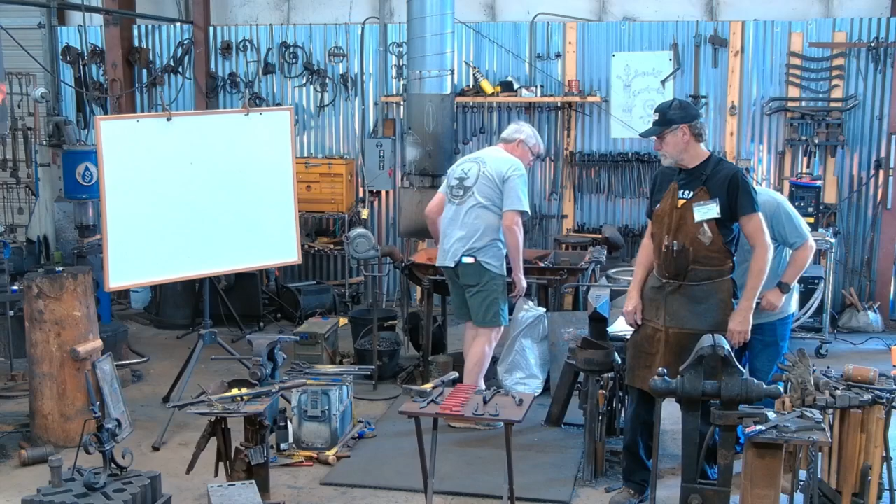All right, everybody, we're going to go ahead and get started. Why? I'm not in the... I know, I'm all right.

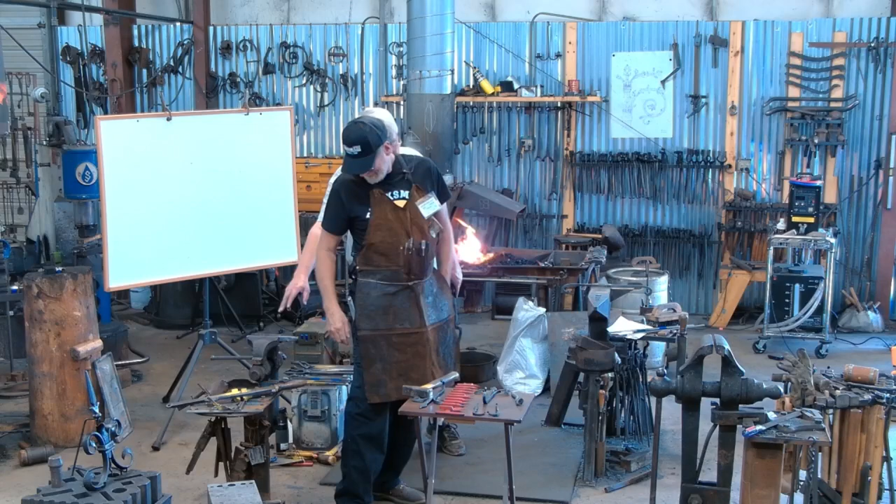A quick side note that's not really a side note, we do have one of our founding members, Mr. Clay Spencer, sitting right up front here. I think Clay's 92, 93 now. How old are you, Clay? Enough? Not enough yet. All right.

Go ahead, thank you. First of all, I want to thank Athens Forge for having me come down. It's very much of an honor to be in this forge and working. Y'all just don't know the talent - well, you do know - the talent, the opportunity you have here is incredible. The knowledge that can be given to you if you're just willing to come and participate and take part of it. It's very fortunate. I myself, years ago, our local guild was not doing real well, and I came that close to making this my permanent forge - 98 miles from the house, but I'd come every month. It's just a great place to be here.

But anyway, a little bit about myself. I started blacksmithing at the Rutherford County Blacksmiths Association about 1990. Did that for a few years. My wife decided to start a business, and I had to change a little bit at work too, working longer hours. But I really did get going hard about 2003 or so, and started going to the folk school a lot and just went hog wild after that. My wife became a blacksmith's widow, she said, pretty much overnight once I got into this. So it was very much a passion of mine. I live and breathe it every day, every night.

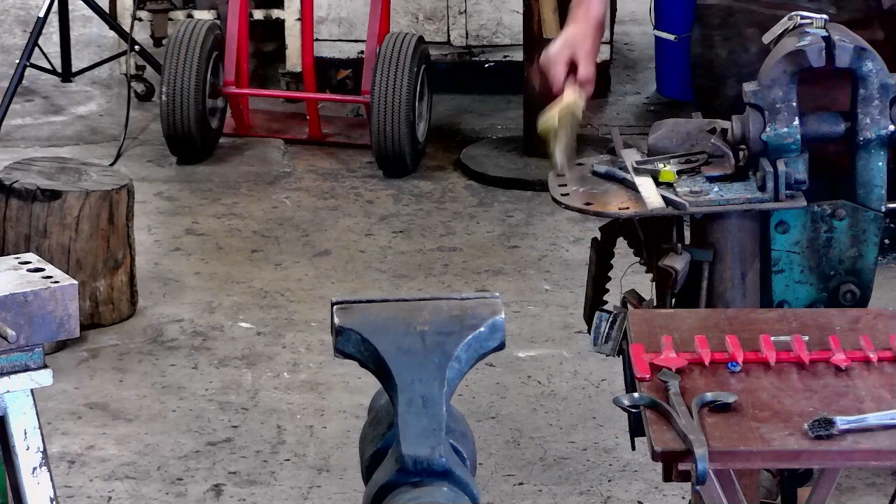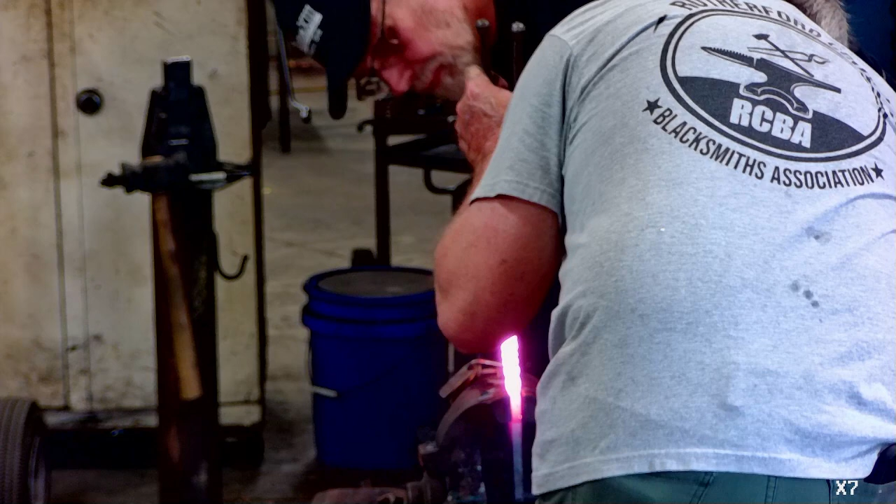Drop down. Oh, yeah, that's good. Actually, I want to go in the other way.

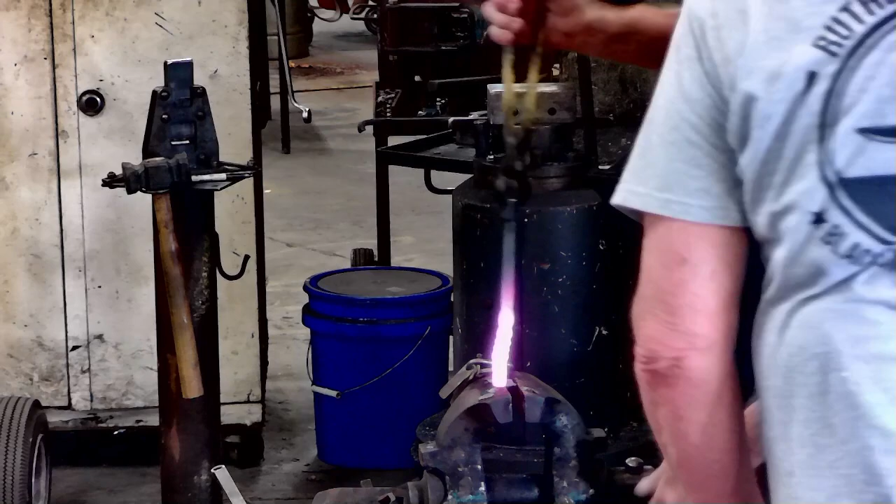Tom and I have not done this together, so he didn't know. That's fine. That looks nice there, pretty good.

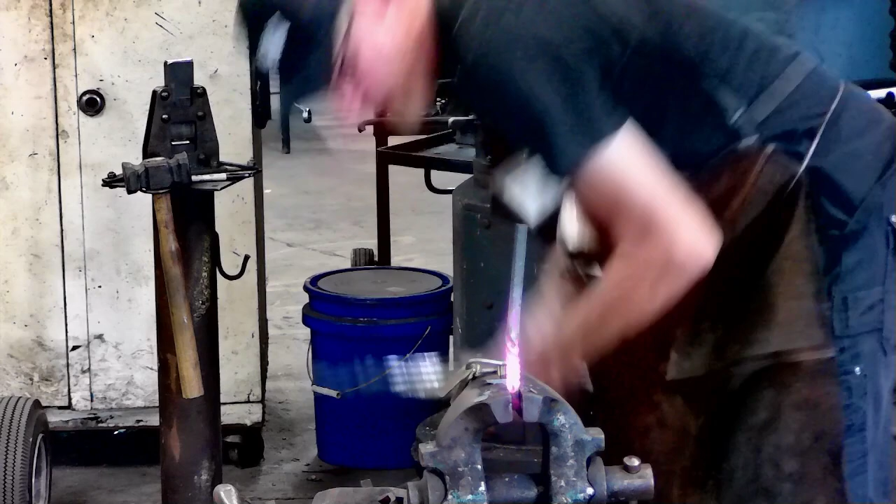Now I'm a big believer, I use a term all the time, keep your house in order all the time when you're forging. When I mean keep your house in order, if anybody's ever built anything carpenter, you're always checking plumb, level, and square. So I'm always keeping everything as plumb, level, and square as I possibly can. So always remember that when you're forging. It will help your life out a lot.

Okay, now we're going to catch this top part right there. And I'll come out of there and go to the anvil here. There's nothing any worse than trying to forge a bar that's bent like this, and you turn it, it goes over like this, and it turns back and forth. But if you can just turn it back and forth, it's a lot cleaner on your forging that way. It's just a simple little thing to do, but it helps out tremendously.

I like to use these leather face hammers quite a bit to straighten stuff without damaging it. Okay, that'll be high enough. Short heat. Good? Yeah. That's good.

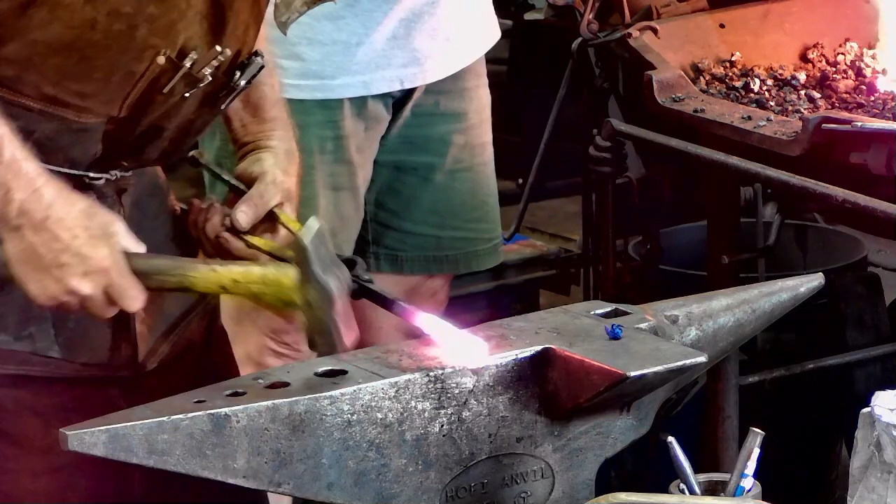So now I'm going to point the end of this right here. We're going to put a point at the top of it.

Always work the edge of the anvil, because then your hammer is able to get back over the air part, and it will allow you to hit down with more force. The edge of your hammer will not be hitting the top of the anvil. I don't think Travis would like it very much if I started working on his anvil too much.

While I'm doing this, I'm going to be rounding this up, and I'll get into the reason why. I'm going to take another heat on this. Yes sir, right there, stick it in. Yep, okay.

When I'm forging, for my style at least, when I'm working the coal, I like to work from the top down. I don't ever put it just straight in, because you're going to make a little pocket, a little cavity. The hottest part of the forge is the coal, not the air going back. So if the coal, the most amount of coal touching your stock, it's going to get hotter faster. That's sort of been my theory over the years. Plus, you'll a lot of times end up with a little cave, which cave fires are really great for forge welding. I like to do those, but I kind of like to have that coal right against my stock.

Everybody's going to have their own theory on a lot of stuff in their forging habits. You make your own theory, whatever works for you, do it. That's the main thing.

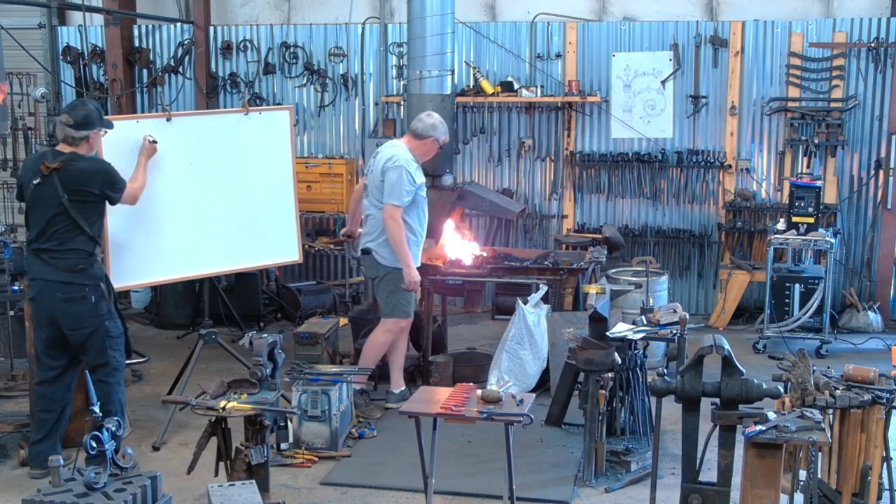Now, one of the things that when I was teaching green coal quite a bit, which we have a very extensive class in our local guild, people did the spade hook and their tops began to look like this - it bulges out like this, that's the way it looks.

Why? Because we forge a point. What we need to do, though, is come in - let me erase this. When you got your stock sort of here and here, it's forged kind of like what it is now, and this down here is round, kind of rounded like that. I come in here with a ball peen hammer, and I'm going to put a little indentation here.

And I'm going to do the same thing over here, backed up by the anvil, the horn of the anvil. Everybody see what I've done here?

So what I've done now, I've preformed the steel that I want to look like, which is this right here in the mass. I'll pass this around. This is something I made several years ago.

It's the 3/8 spade hook as well as the 1/2 inch. Hi.

So on that same note, this down here I made round - it was square originally. When you take a piece of round stock and it's backed up by the anvil and you hit it here with your hammer, this is going to go this way and this way. So you're going to get a lot more spread in your leaf than you would if you left it square.

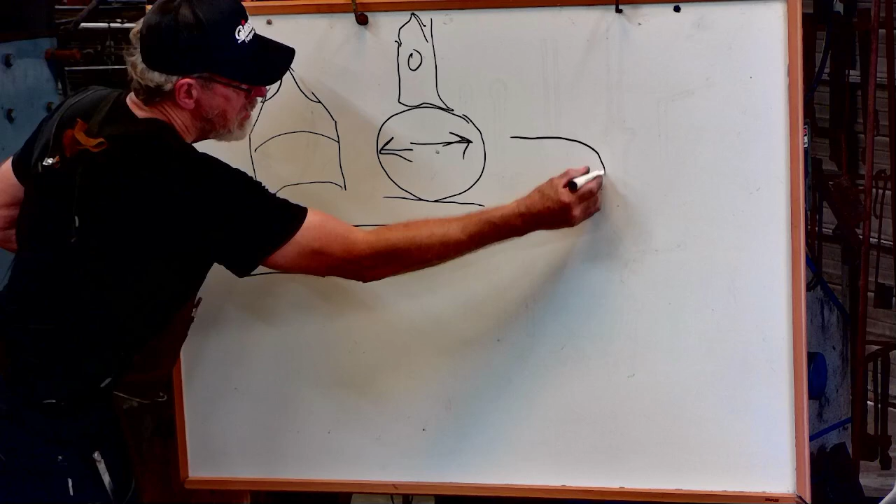And then I'll be turning over to my cross peen, and I'm going to start spreading it left and right. Any questions or statements on that? It's one thing I found over the years, to get that nice spread of stock going really allows you to get it really wide.

All right. You got it? Yeah, okay.

Now I brought that down to just about that much in thickness. I'm leaving quite a bit of mass. All I've done is just made a little bit of flat on this side.

You can see how it's got the little offset there. See it back there? This is flat side there. The end is spread out there. You can already start seeing some of the shape I'm talking about. Yeah, right in that area.

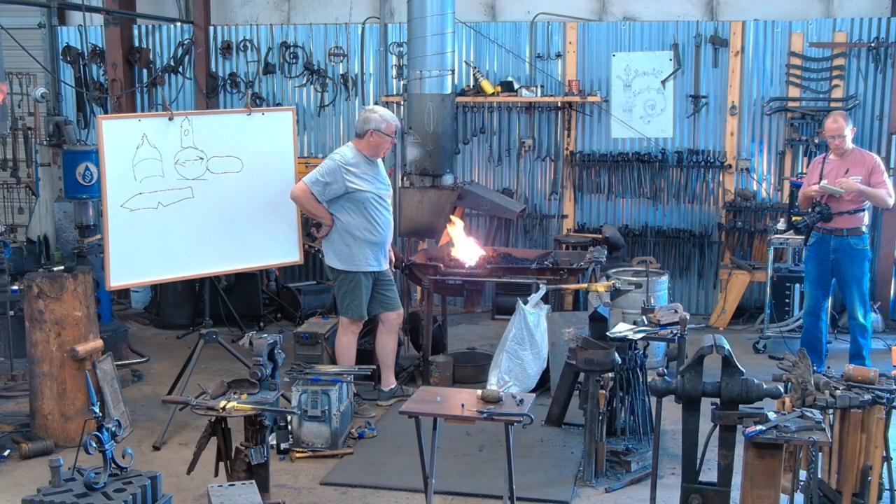and now I put that little indentation in it, right here. You can kind of see it here a little bit more pronounced than I had earlier. Right here I'm talking about, on that tip, kind of gave it that little swoop. Right in that tip, right in there.

Show it to the camera. Show it to the camera? Okay, where's the camera? Okay. Do I need to back it up?

All right. There you go. We'll warm that back up again, and I'll come in and I'll start my cross peen, which is nothing but a wedge driving in the metal.

It's going to spread. This part here is the steering wheel part of the hammer. You can guide the steel anywhere you want to go. Twist it this way, this way. You can actually roll it up on the edge of the cross peen and work more detail. You don't have to use the whole piece. If you need to just peen something out this way or this way. But there's all different style cross peens. That's going to be your steering wheel part of the hammer, I call it.

A little more heat. Yeah, a little bit more, go a little bit deeper. You can cut the air back if you like. Just cut it off for a second.

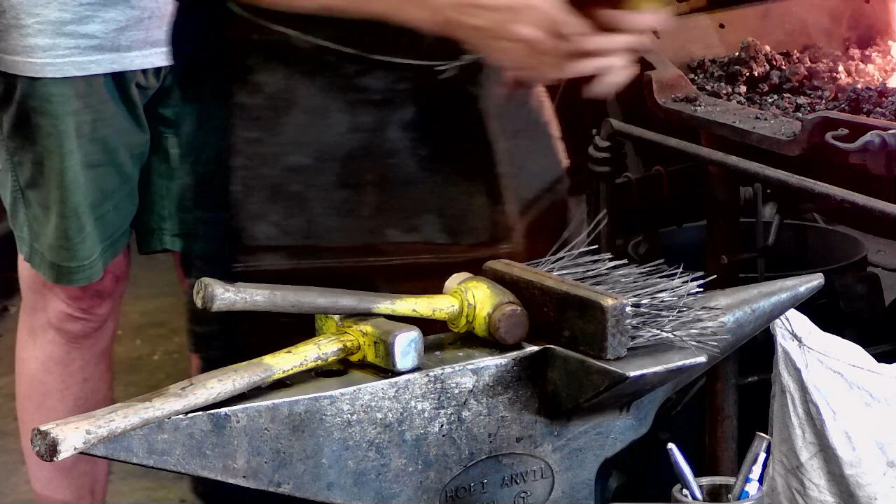Water. Water right here.

Blacksmith Depot? Okay. I like those long bristles. They're nice, they clean really good.

One day I had a piece I was holding in my hand like this, and I handed it to somebody. They said, 'Oh God, it's hot.' I said, 'Well, it's just warm,' I thought. But they dropped it all on the floor. But this is sort of what we got right now.

By presetting a lot of mass, by presetting those forms when it was in a larger mass, it allows you to just hammer stuff out and it becomes that. So just remember, if it's something you want to form into a spade or something round, preset the shape, blast that out and send it left and right, or however you want, with a cross peen hammer.

The next thing we want to do is, I have another piece here.

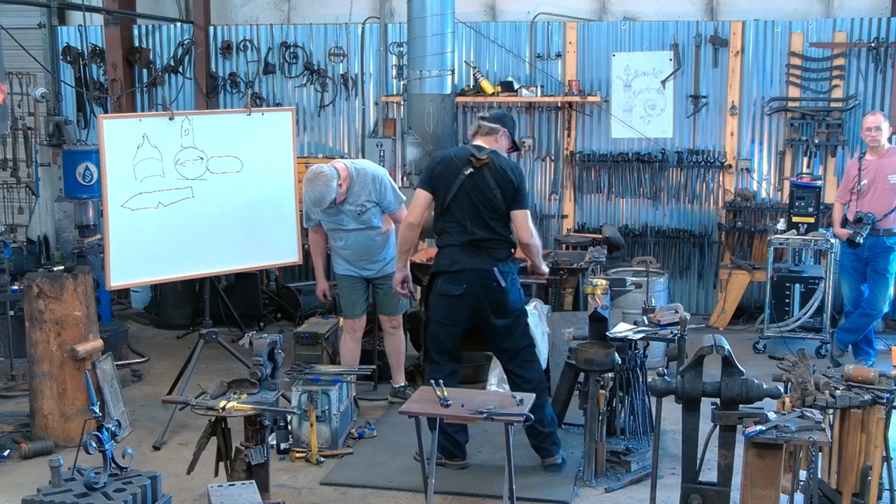Stuff on the back side of your box too. No piece of metal about that long. No, I was looking for the short piece, another piece of that. This is it here, not that.

Anyway, we're going to form a taper on this end right here. I want that to be about 4 inches long after I taper it, forge the taper out, and I want it to end up about 1/4 to 3/16 in width or thickness left. I want to keep a 1/2 inch mass running long ways with it, because I'm going to bring another piece of 1/2 inch bar around that. I don't want it any wider than half, nor any less. So I'll be using a gap gauge, checking that regularly.

This is one I made years ago, not as fancy as the one that Travis and them made down at Ernie's class, which I didn't make it to, but I do have a little ruler on it, with marks at 1/4, 3/8, 1/2 inch on up to 1 inch. This is a real handy little tool to have for quickly measuring stuff when it's hot.

Buy these also. Ron, you were making these for a little while. Ron Howard, you were making these for a while. I've got one of his. I should have brought it, but it's too nice, too pretty. Ron does some really nice work.

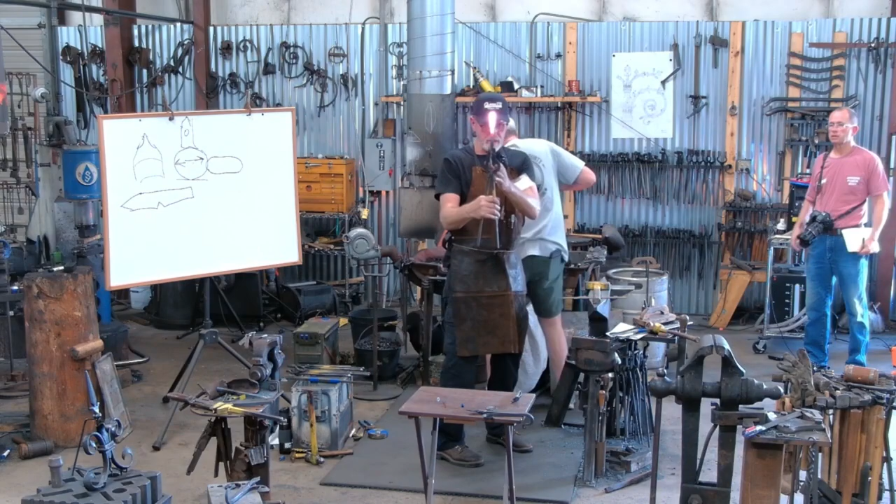Catch that crossways in there. Yeah, like that. Now I'm going to catch this. I want to make sure I'm looking at the little spade up here, because I want to catch this on the side.

For me, when I'm forging anything to a given dimension, I like to take the finished end, which I'm wanting to be about 1/4 to 3/16, down to a pretty close size, because I want the rest of it to be about 4 inches. That end is pushed out just a little bit.

Keep your house in order. I'll upset the end of it back like this, so that gets that back square again. I'm losing a little bit of heat. Your favorite friend in blacksmithing is heat.

Any questions or statements at this point? Y'all quiet. I'm not doing that good.

Yeah, that's good. Always brush back to you when you're demonstrating. You don't know who might be sitting in front of you. If you do know who it is, you can brush forward. You might want to shower a little bit of sparks.

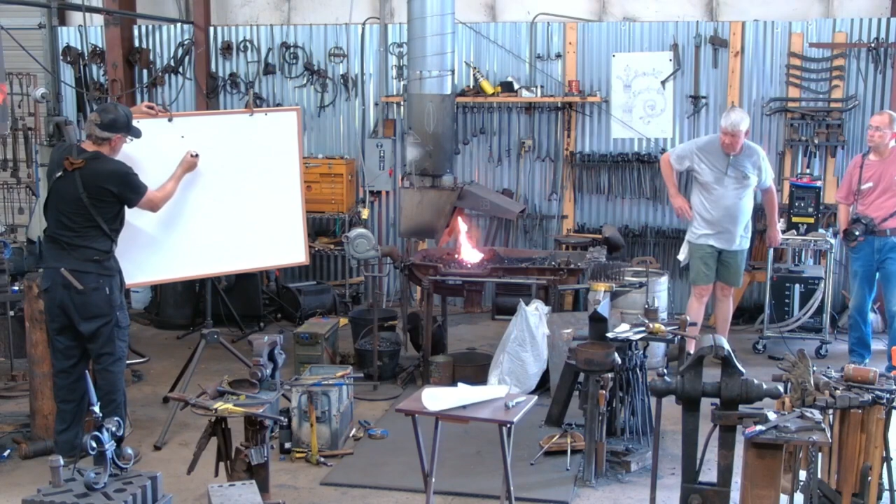But why does that work? Why do we bend that? Several people here may have made sheet metal cones before, to make a roof vent where a stovepipe's going to go through, sort of like a dunce cap. So the way you make that, and the way you come up with it is, you have a point up here, your stock is out here, and you come down here.

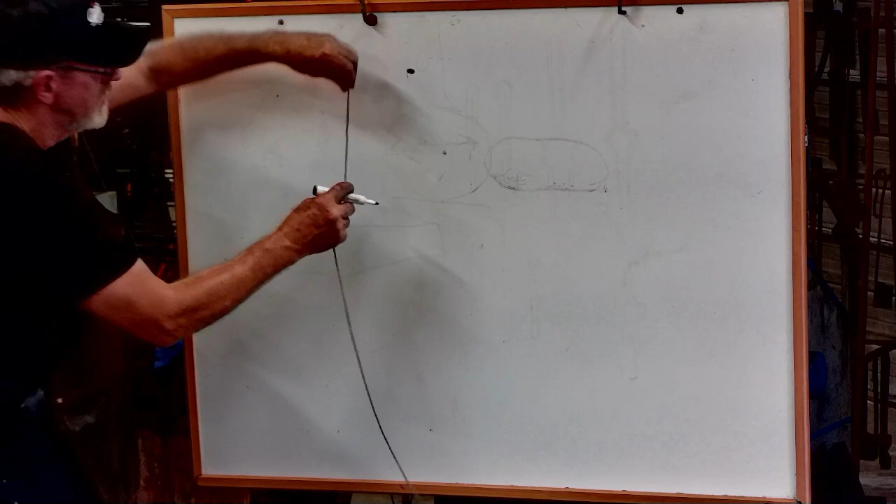I carry this belt a lot of times for measuring, as well as this. I'm going to hold that right there, come down here, and draw this arch, just like this. So I cut my sheet metal. I'm going to draw an arch up here too, that's where the opening is. So I cut my sheet metal where it does this.

So it's the same thing as the scroll there. It's going to be arched like this, and it's only going to be 3/4 of an inch in width, like that. Anybody got any questions on that? This is something kind of new I'm trying to teach with. Everybody understand what I'm at on this? Please give me feedback.

So you can see the stock there in my sample pieces going around, how I bent it to that. So when it gets wrapped around by little hits here, here, here, here, here, here, here, and here over the horn, that's going to wrap it around to where it's going to be flat. You could take this piece of sheet metal and put it in a brake or on the edge of your table, and keep crimping this piece right here, just crimping it, that, and that, and it'll be round. It'll have flats going like that paper. But that's the mechanic side, the why a bevel scroll works. It's about the curve in it.

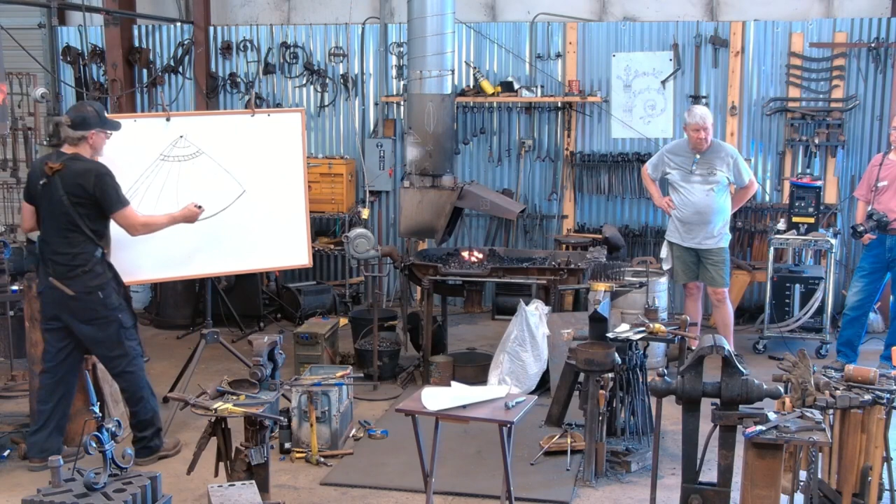So I actually took that little scroll and made it real small, like that. And I came up here, brought these lines up here and here, and came down and laid the whole thing out. Knowing the distance I had to make to wrap it around, I actually laid it out that way. Now, being that small on that little width, you can make a lot of adjustments with a pair of scrolling tongs or anything you want. It's not a given, but you'll kind of see that's the process of making this happen. Anybody got any questions on that?

Y'all too quiet. But once you end up taking that and doing that 90, do that turn on the last step, does it automatically cup or do you need to cup it? It will start automatically cupping. Now, sometimes when it comes out to that little point, that will want to go flat with you because there's just not much resistance. If I had that totally 3/4 of an inch or maybe an inch in width on that bevel part, it would stay more uniform. But where it comes to a point, it has a tendency to get distorted there.

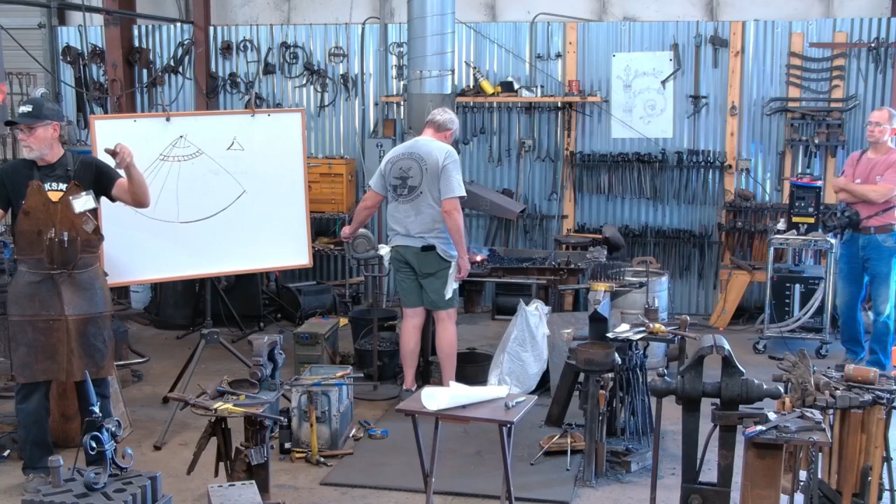If you want to make this and you don't want to put the bevel scroll on it, I've seen this same thing done years ago with the same hook. I just came off of those two wings and took two curved pieces, just a nice simple scroll curved out, and they look just as nice.

Let me get you a piece of 3/4 stock, or half of 3/4. I had a long bar, 1/4 by 22 inches. Just take a short heat on the end, just like this.

Any questions or anything?

The first thing I'm going to do is start bending that over on the end, that little piece, and then turn it and come to the side of the anvil here and start drawing it out to the side. I believe you can pull metal with your hammer doing it this way, a considerable amount. You will not ever push metal this way, you can almost forget that. But you can catch the stock right here on the edge, hit it at an angled hammer, and pull that stock. It'll pull with you, trying to spread it out, because that's what I'm wanting to do here - pull that out.

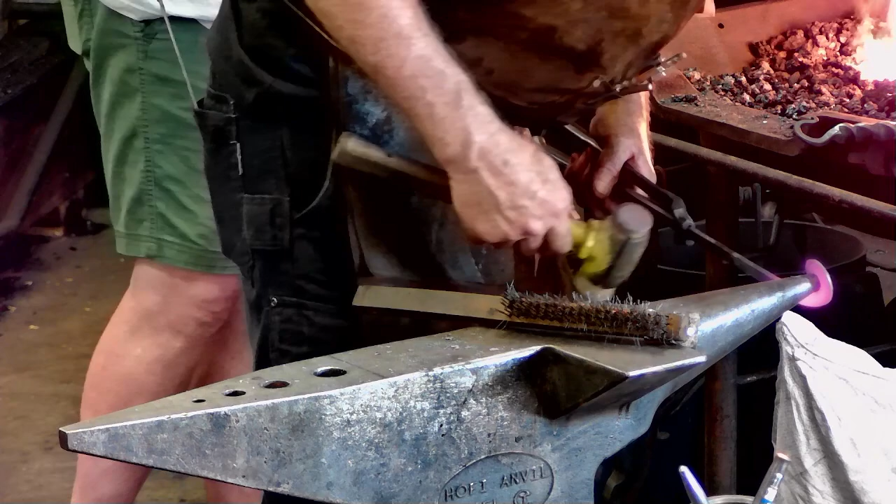I said about training your eye, sometimes it can be the devil in you too. I could see about a 64th of an inch there that had just a little bit of a piece sticking up, just didn't look right. So it can be the devil in you, it can be a big curse.

So that being said, this part here is done at this point, and then I'm going to come in next and curve that around. But I just want everybody to see it. How are we doing on time? 10, 15? Okay.

Okay. Did I pass the other piece around, the double end? Did it come around, the double end piece? One of these was on each end. Okay. This is sort of where I'm at right now - or not where I'm at, well, halfway there.

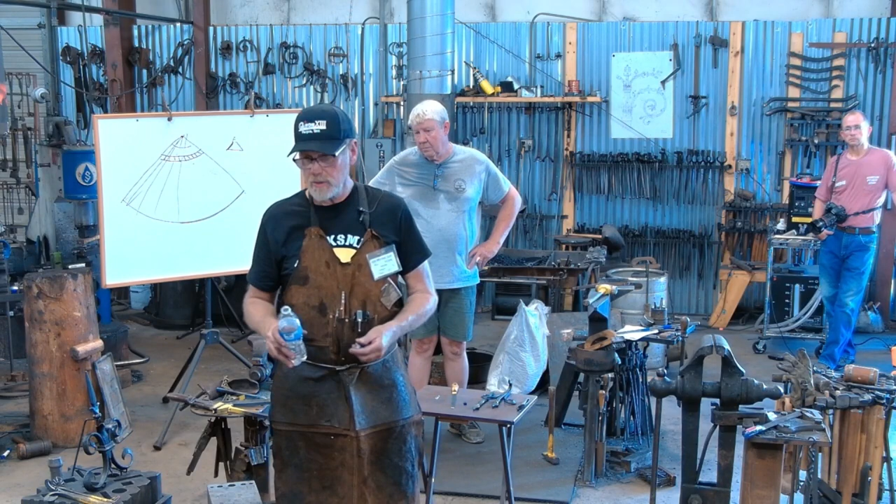Trash can. Thank you. All righty, it's hot. Might be hot enough already. Okay. Oh, yeah.

Now we're going to try to repeat what we're doing. It's always the hardest part. Somebody once told me, might have been Clay, said, boy, it looks good, now make 20 more. And see how close they are.

Yeah, that's correct. I did this one time, kind of like that cartoon where they had the guy making the canoe. One end went up, one end went down. I did this one time like that. Most of the time when I do this, I'll usually hit the same end down here. Just say, okay, that's how I want it to be.

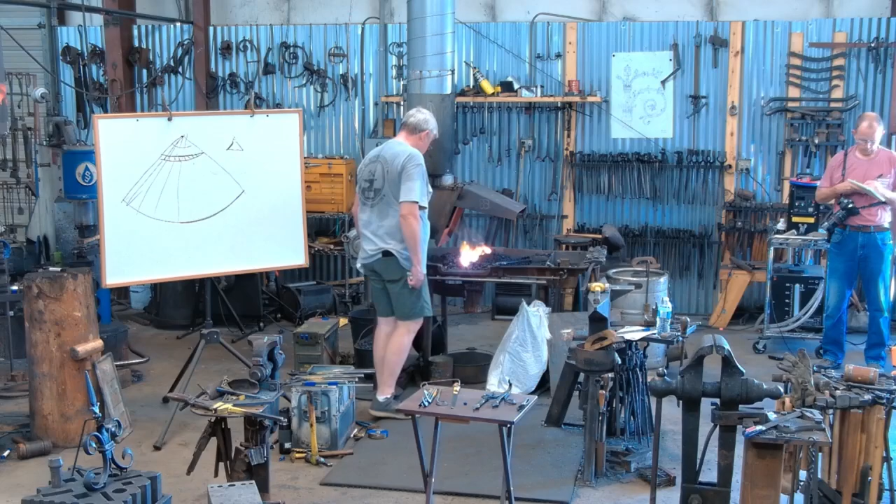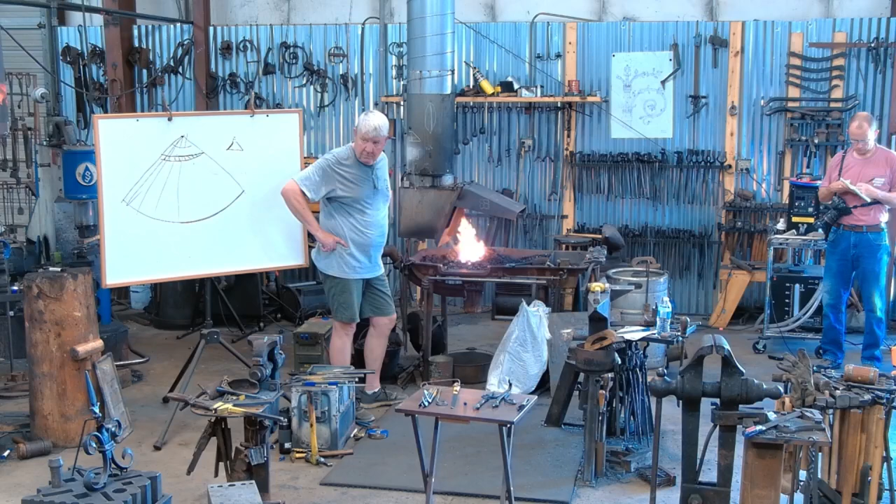I finally get that bevel the right angle that I'd like for it to be. You can kind of see the angle there. There's the angle there. You see the angle.

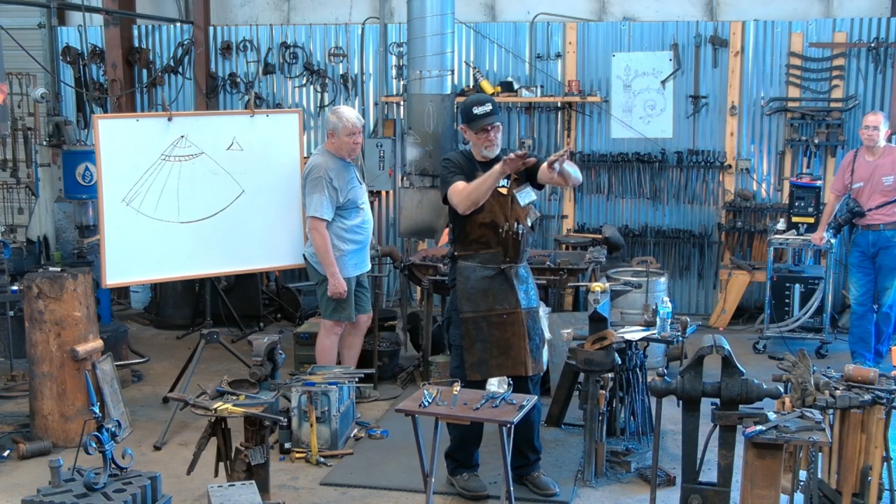Now, a little thing that I've picked up on doing these: when you're looking at your tongs and it's to your right, you want to twist your tongs counterclockwise. Why? Because I want this piece that's coming out like this, it's between my tongs. I want the tongs to go flat and this go under it. So I'm twisting the metal. You want to take your hand and gradually bring that around. So that's going to take the outer edge of the inside of that radius and be on up in the air. See, the outer edge will be on the anvil, and so I'll be knocking the inside down. But now the inside will be on the anvil, and I'll be knocking the outside down.

So that's what, yeah. Can you use the cone over there next to the camera to get that rounded? Can I use what now? Cone mandrel.

Cone mandrel right there by the table. You could, but it'd be real difficult because you're working this way. Now the cone would be a good anvil to go clean it up. This anvil here is also a very good anvil to clean it up and detail it. But it doesn't really form it. Each bend has to be bent individually. If you took a pair of scrolling tongs and just tweaked it around, it would form that edge. Maybe not as smooth and nice doing it this way, might have some steps in it, but it would do the same thing, because that's what you're doing here.

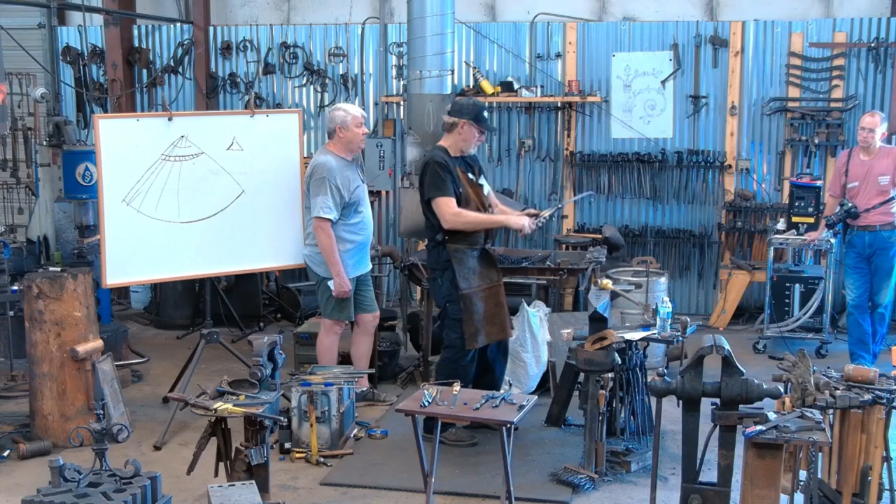Close right there. That's pretty good right there. As a good blacksmith friend of mine, Bob Gillen, says, pretty good shape for the shape we're in. So I think we're in pretty good shape on this right now.

Remember that piece is 22 inches long.

I've got a little surprise later on, something I learned strictly by accident that blew me away. We're going to talk about it here a little later when I get this done. Hopefully I'll have about 15 minutes left over.

Let's go ahead and catch this off. Got a rag? Had a rag over here a minute ago, didn't we?

Whoa! I wasn't ever too good at baseball. Yeah.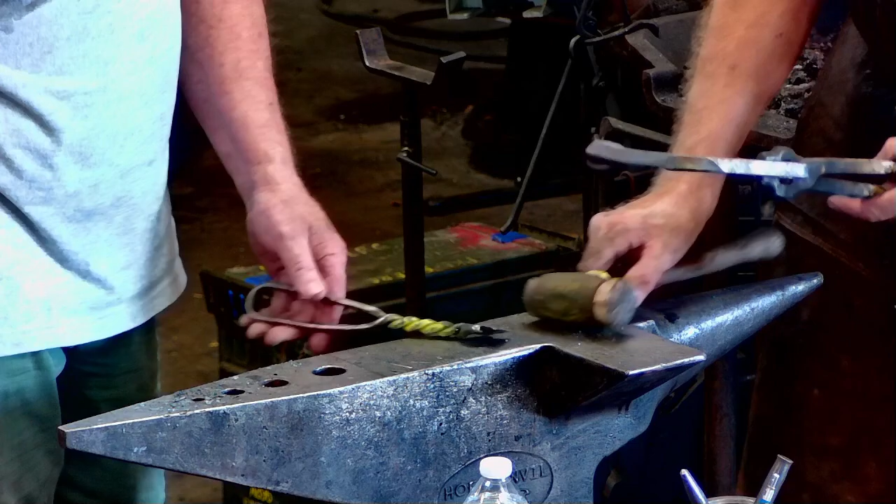Yep, that's good. What happened right there is just a little trick. This had a little flat right in here, and it needed to be hit down right there. So I put this right here like this, held Tom on the other end, and hit right here. That pushed it. It had a little kink, went up like the pitch of a roof right there. Now I want to get that out.

Go ahead and cut that back. We're getting ready to forge weld now.

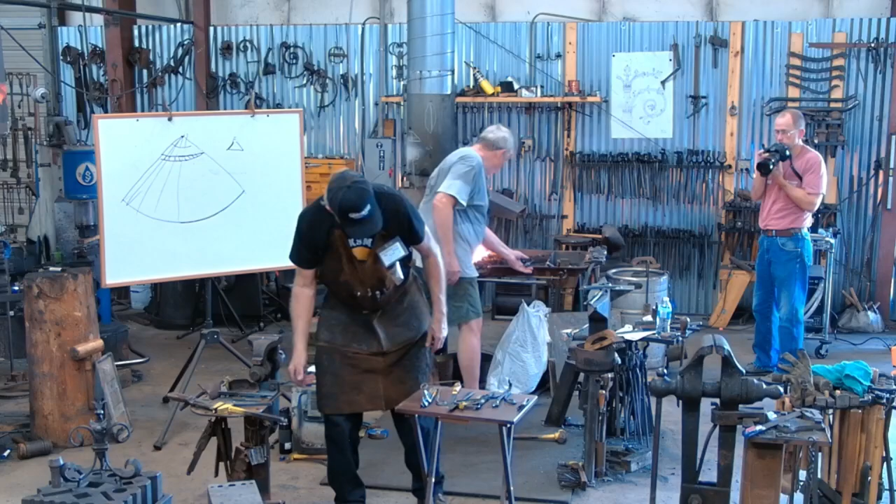Let's see, the piece that I finished is right here. This is done here, touch mark in the back. So this piece here is going to be inserted just like this into it, and be forge welded. Right there.

I'm going to open that up just a little bit, so I go over this nice little step right here, which is pretty handy. Open that up just a touch like that.

Okay, Tom. That's the back side there. That all looks good there. When you're doing this, make sure you've got your piece not reversed. Putting it on the back side, make sure everything's looking correct here. So it'd be a bad deal right now to have to deal with clinkers. I had a lot of clinkers. Okay, Tom's cleaned that out. So we're going to get a clean fire here to do this forge weld.

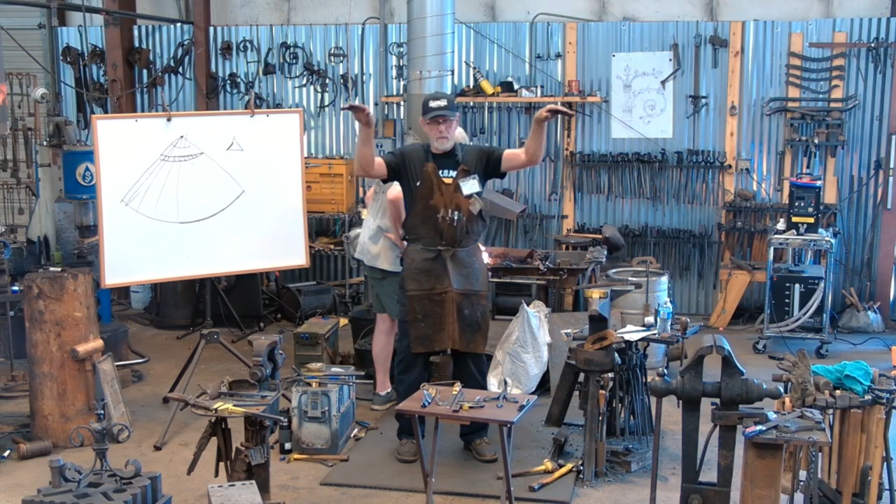I'm gonna heat that centerpiece and pull that up some more. Just go ahead and cut the heat back. Right now, the two sides are coming out quite a bit of an angle like this. I want to kind of pull them in a little bit.

Remember one thing, it's a statement I learned a long time ago: forging is fast, tweaking is forever. So I'm gonna have to pull the plug on tweaking here in just a minute. But I got a little more of this to show.

Cup of water for quenching. Oh, right there, I'll do it right there. Cut the airway back. Getting ready to do the hook now, so I'm going to come out. I'll quench the end with a little finial swirled around so we don't crush it.

Then I'm going to go to the horn and roll it over. I might walk around this side of the horn and do it over here because I do my hammer on the side, not straight across. A little bit of air.

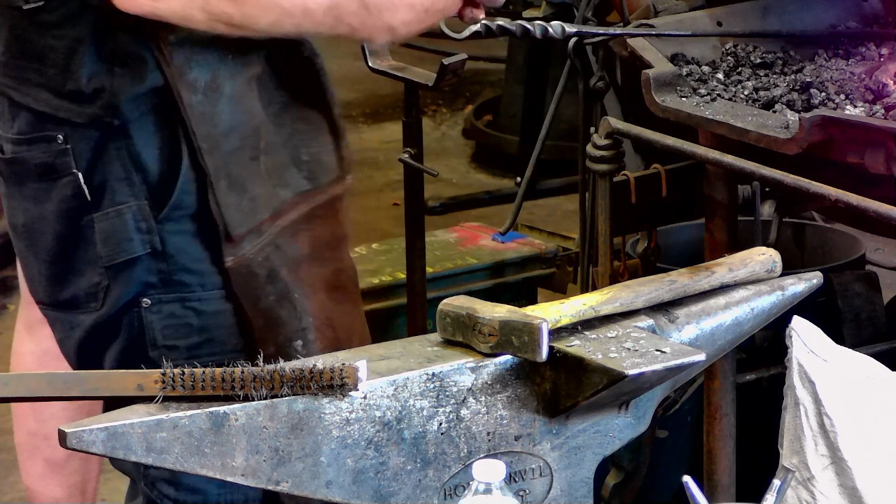How much weight can you hang on that hook? More than the nail probably, more than a nail ever hold. But you'll be surprised, the shear weight of a nail is huge. I've looked at some statistics on lumber, and the shear weight is pretty high.

Now, if you get the wax out in there, some brushes. That's good, all right, I'll get this open. Now if you go, I got it there. Thank you. Now if you will open up that other ammo box and get out my scales and stuff, everything in there.

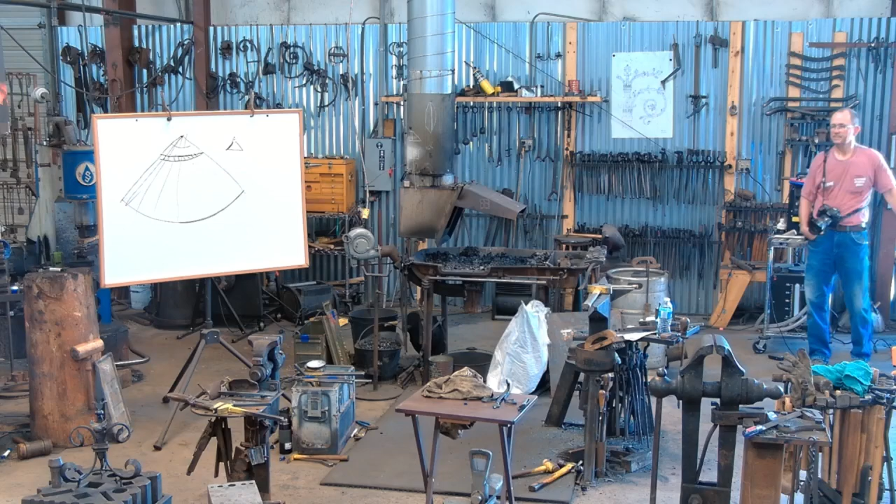Any questions? Statements? Well, Al asked earlier, how many did I have to fail doing this? This one was the second one, the other one I had around here is the first one. Actually, this one was the fourth one. So, okay, that was right here. So anyway, we're going to talk about the failure and why it failed.

Several years ago, I came up with the idea, and it has worked very successful, of figuring mass out with weight. So, where's my scales? I used to balance, well, machined a lot of pistons for some of the race car people, and I'd like to send them back to them pretty close to right weight, and I'd use these scales. I found these scales at Clark's Junkyard up in Murfreesboro.

Found a man out there, I think it came from the GE plant. So I would take mass, and I'd take this piece here, and I would take this piece here. We'll just take both of these pieces, and I'd put it right there. That's what it took to make that whole thing. Right? Right.

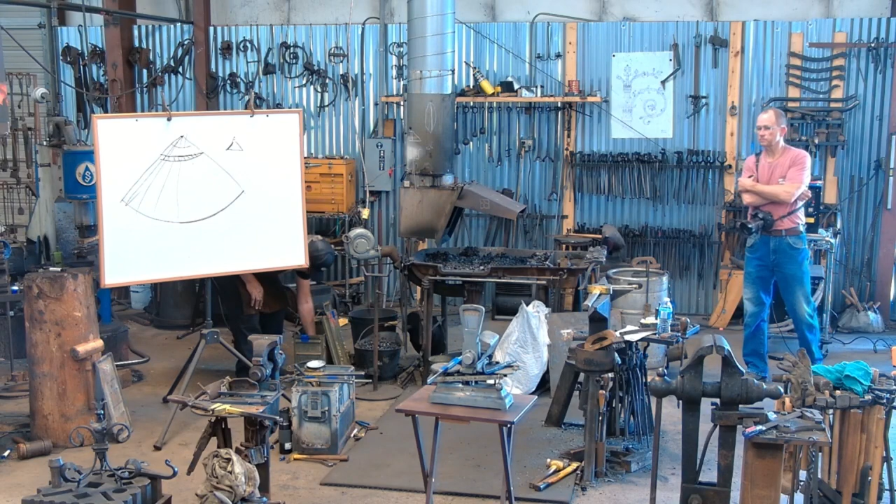Well, I'm looking for it here somewhere. Well, I'm not seeing it. Four inches, I lost four inches, a quarter by half, four inches. If I find it in here, I've got a piece cut off four inches somewhere. Because I figured when I did this before, I said, oh, that'll work. Well, I made this at 18 inches, I made this one at 20 inches. But I couldn't, it just blew me away. I said, what's going on? Mass is mass. I wish I could find a piece of, it was somewhere around here, a piece of short, a quarter inch by four inches long.

No, I don't think so, it'd make a little small piece. Oh, right here, no, right here. Well, these are his amble spacers. Anyway.